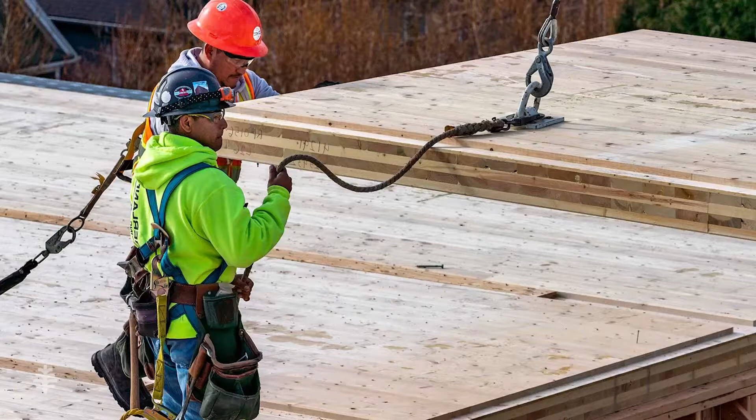As part of the agency's effort to steward the whole, the Forest Service helps convene the Keeping Forests Partnership. Keeping Forest is the Southern Region's high priority working forest conservation initiative, supported by around 40 partners from across the forestry community.

Forests really are our planet's hardest workers. They help drive our economy here in the South. They positively impact the physical and psychological health of our communities. They help filter our precious water and air. They provide abundant habitat for wildlife, and they offer a wealth of recreation opportunities.

Over 110 million people and growing call the South home and depend upon the benefits that the roughly 245 million acres of forest land in the South provide.

We're incredibly fortunate in the Southern region to have a long history of landscape level assessments related to forests. It dates all the way back to the late 60s. These assessments look at how land use is changing and also the condition of our forests. The most recent assessment, developed by the U.S. Forest Service and the Southern Group of State Foresters, is the Southern Forest Futures Project, published in 2012.

The Futures Report forecast that we could lose up to 23 million acres of forest land to development by 2060. Keeping Forest was started to address this potential loss of forest land, and the approach to conservation is radically different than the traditional approaches.

Partners within the initiative are a diverse range and include NGOs, industry, private landowners, federal, state, and local governments, water utilities, among others, but we all have a common mission: to ensure that in 2060, we still have at least 245 million acres of forest land in the region. We're focused on systems level change using a collective impact model.

Now, keep in mind, that's 2020 data, so we look at those prices. When we start comparing these, and look at the average size of an elementary school or middle school, high school, and so on, what you're going to see is the potential savings per square foot. Again, the cost per square foot is relevant to the time at which it was taken.

This comes from 2020 ICC. Now, ICC is the International Code Council -- they're the ones that develop the International Building Code. The numbers we're looking at are a summary of the average building cost. They pull this together twice a year, and this is what a municipality looks at when they look at permit costs based on what type of construction it is, what type of occupancy, which in this case is educational, and that's where this price comes from. So it's fairly accurate, but it does represent nationally what the cost would be.

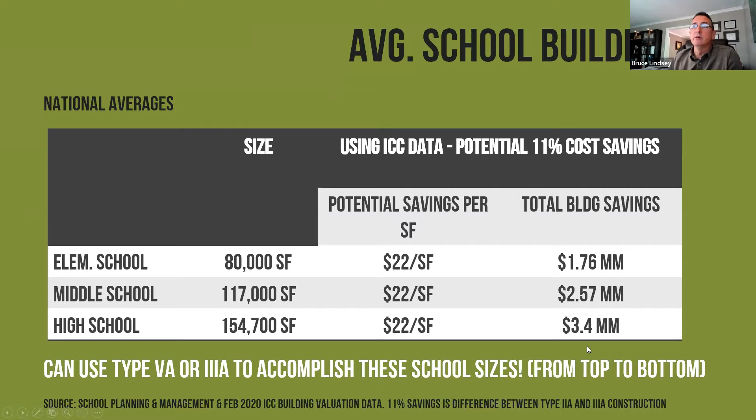So if you're looking at the average size school, you can see by using type 4 or type 3 and 5 construction with wood, we're talking millions of dollars in savings. This is critically important when we start talking about where wood fits into these schools, and what the draw is if you're on that school board or a facility director to go with wood -- something that typically has not been used in large scale educational facilities.

So here's an example: Fountain Lake Middle School in Hot Springs. If you look at that, it's traditional framing, sheathing, the initial steel and masonry estimates -- which I'll dare to say most of us probably went to a building or school that was composed of CMU and then steel of some kind for the roof system.

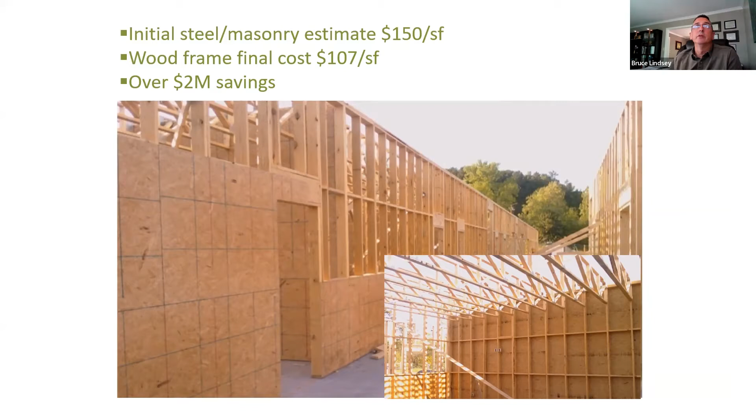You can see that over the entirety of the project, there was $2 million in savings.

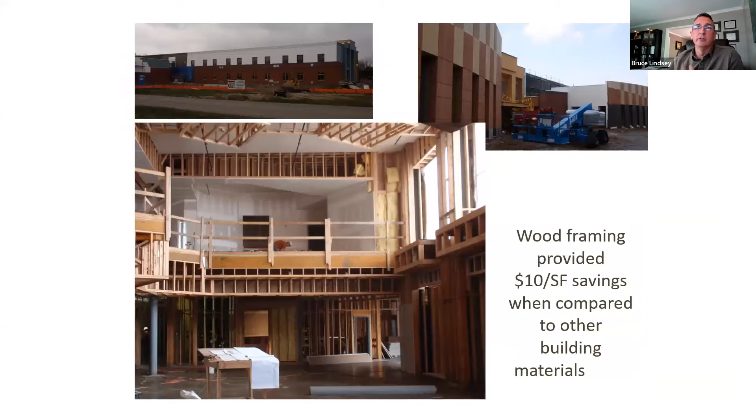Here's another one, an elementary school, 71,000 square feet. And again, you see about $10 per square foot savings in the structure compared to other building materials.

Newport Elementary School, now this is older, look at 2010, larger one, 124,000 square feet. Now I want to point out, you'll see some steel here. This is what we'd call a steel moment frame. Basically when the wind blows right to left or left to right, we have to brace the building somehow to keep it from racking, and so a lot of times we'll see steel incorporated into that. That's just a structural necessity depending on where it's at.

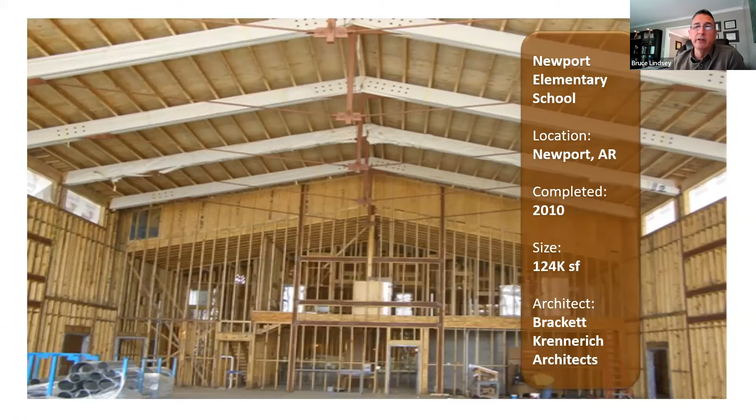So if you're near the coast, you're going to have high winds. If you're in a seismic area, we're going to have to deal with seismic loads. So sometimes you'll see that incorporated, but the reality is there's still a whole lot of wood in this project, and it's allowing us to do a lot of things we couldn't do before. So it is common to see a lot of hybrid projects.

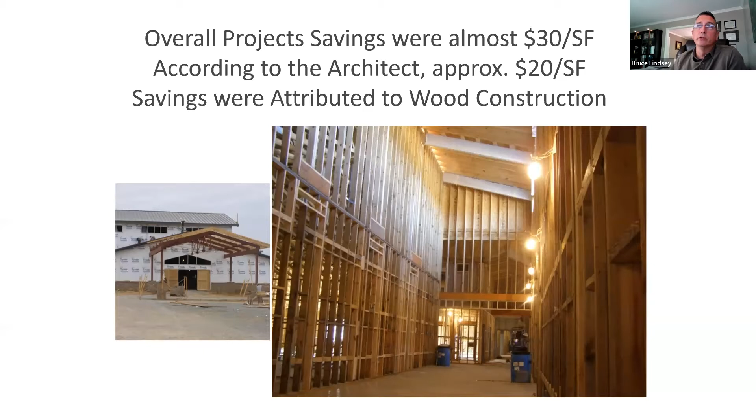But on this particular project, the savings were $30 a square foot, and according to the architect, $20 per square foot of that was attributed to the wood construction. So it is quite feasible. We've seen it, we know there's great savings to be had with that.

The El Dorado High School is probably one of the best examples, and you're going to see me reference it a lot today. As you look at it, you can tell it looks like any other school building. There's no way you would really know that it's wood constructed from the outside. It has all the durability and the beauty of any other project. And that's really the goal here, that you don't have to defer on efficiency and sustainability to get wood construction in these buildings.

And this is a large project. You're talking about 1,600 student capacity, over 300,000 square feet in total area. Now, again, this was built about a decade ago, so you're looking at a $43 million construction cost, which is unheard of at this point with costs now. But the construction cost was within the realm of all other building materials, so it was $134 a square foot for construction, and that was very reasonable and very efficient. It's a great project.

And this is going to become more important. Now, I showed you this before. This is the cost per square foot for an educational building, what we call an E occupancy. The occupancies vary - you could have residential for multifamily, E for educational, there's mercantile. These are broken down and fairly accurate, since ICC does their valuation data twice a year. So this was the cost in 2020, this is the February 2020 data. Let's just focus on one - let's look at type 3A, which is $175 a square foot.

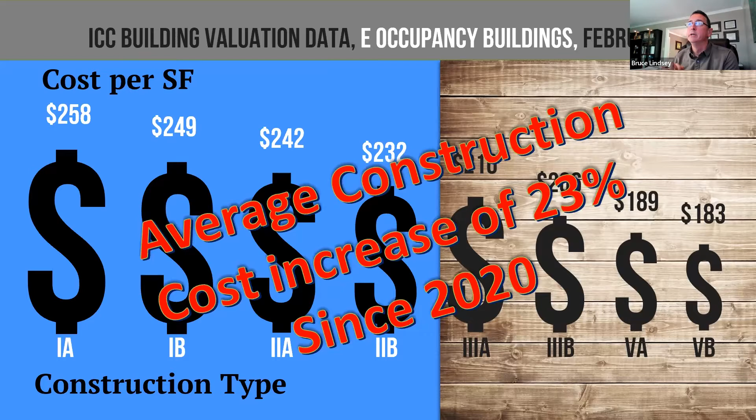It's been a great era for us in the wood industry, but there is a trade-off because it does slow down construction to some degree because of the high cost. Now what this means for schools is that if you're looking to build a project, you've got to add almost 23 to probably 25% by the time it's all said and done, just for the increased cost of materials. So more than ever, if you can save any money in the project, it's going to be critically important. What are we talking about in the school?

But if we start getting into higher education, high school and above, we're looking at things such as labs, which have a larger space, and libraries, which again, you could probably put some columns in, but you really want that appeal and the ability to store heavy materials such as books.

And then ultimately, the biggest span we see when we look at academic or educational buildings is that gymnasium or arena area. These are large spans, and that's more difficult.

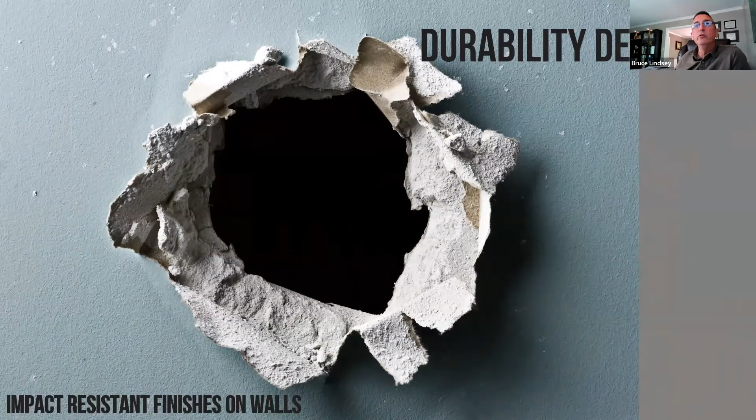One of the challenges and misconceptions about using wood in educational buildings is durability. We've all gone to school, we've all seen at some point somebody damaged, carved, cut, or vandalized something. The general perception from the public, and particularly from facility maintenance directors, is that wood is not durable.

One of the biggest things is something as simple as a library cart going down the hallway. If it's just sheetrock, it's going to gouge into it if it hits it. If you've got 1,000 students changing classes every hour and a half, book bags banging into it, leaning on it, graffiti, writing, handprints, you name it.

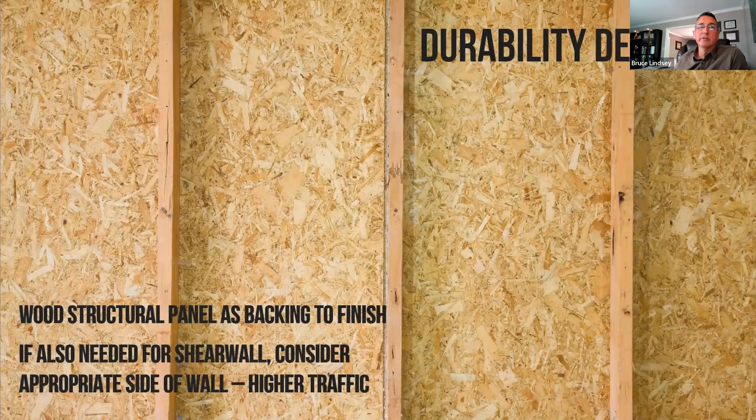Gypsum is not always the answer, and that seems to be the more typical way to do it. One way to avoid those penetrations is to simply put a wood structural panel behind it. Very cost effective, very simple, and structurally it makes the building much more rigid, giving it what we call shear walls, which eliminate the building from racking, and many times are actually required to get the structural capacity out of the building. So there are ways to do it, and we have to be smart about it.

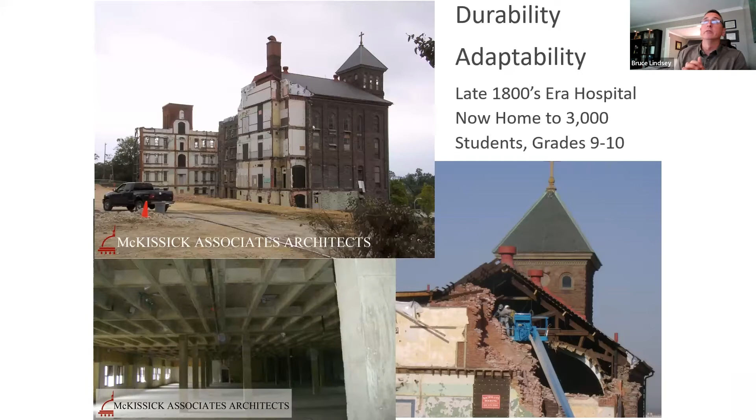This is actually up in Pennsylvania. This building's over 100 years old. It was a hospital. Now it is a school that's home to over 3,000 students in grades 9 and 10.

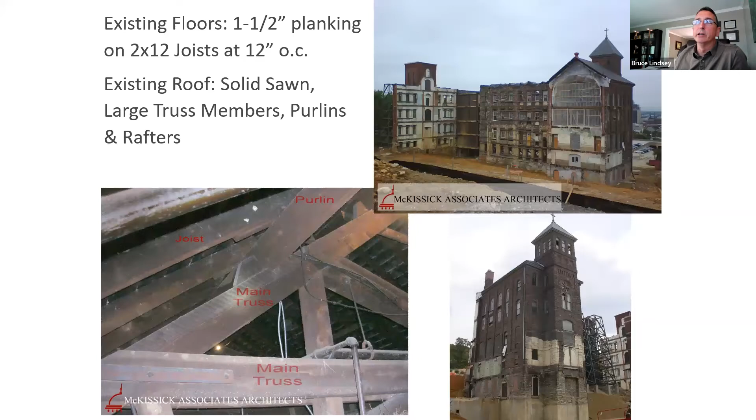So it was an existing floor with planking. You can see the old building there that they've gone in, they've cleaned it up, and you can see that bottom right-hand picture. This was a beautiful, beautiful building. It's quite iconic in the area. And you can see the results.

So for this intermediate high school in Pennsylvania, and again, this was back in 2010, they did almost 200,000 square feet of renovation and then added 122,000 square feet as an addition at a cost of $79 million. Now, keep in mind, 2010, that cost is likely doubled by this point, but there was huge savings in renovating that, and look at the beauty of that.

And that's the reality of building something that has beauty and it has value to the community. They're going to tend to take care of it. And they're going to tend to want to keep it. And that relates to long-term investment.

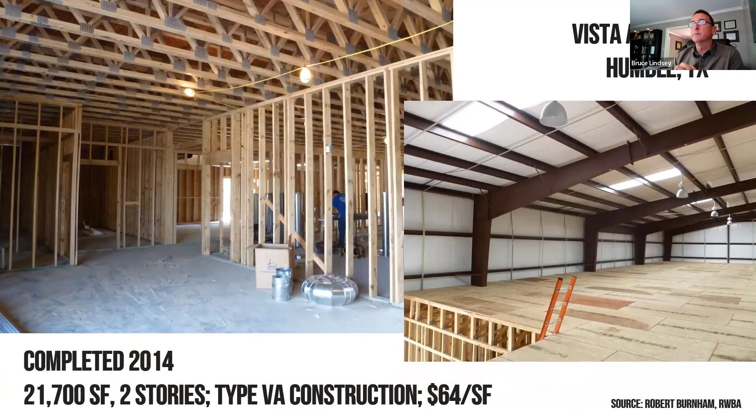Here's a project in Texas. This is a school. It was built out of wood. Now, again, notice on the far right, you'll see that there's a steel structure there. And that's what we call a pre-engineered metal building, a basic warehouse. And then they've gone in and they filled in the floor system with wood. Very cost-effective way to do it.

Not real attractive. And the reality is when this building gets to a certain lifespan, it looks like any other warehouse, and it's not likely to maintain itself with any value, although I don't know what the regionality of this was. It may be a school system that's remote, it's suffering from financial problems like every other one. This might have been the best resource they had.

Compare that to this. It was $30 a square foot more. But look at that compared to this. And the reality is, what is the longevity comparison?

This is a beautiful building. There's a good chance that the community is going to embrace this building and see the beauty in it, and they're going to maintain it. They're going to want to keep it. So that investment, as you look over time, even though it costs roughly $30+ more a square foot, you've got something that's much more valuable and has much more longevity for a variety of reasons. And it's much more beautiful.

Looking at those gym areas, we're talking areas that are 7,000 square foot, give or take, with ceiling heights that are over 20 feet. And the spans range from 60 to 300 feet. Now, most wood products don't span that far. We're talking about 2x, we're talking about trusses, I-joists, whatever it may be. But there's some limitations on what they can do. About 30 feet with trusses and I-joists. Obviously, about 20, give or take, with traditional lumber.

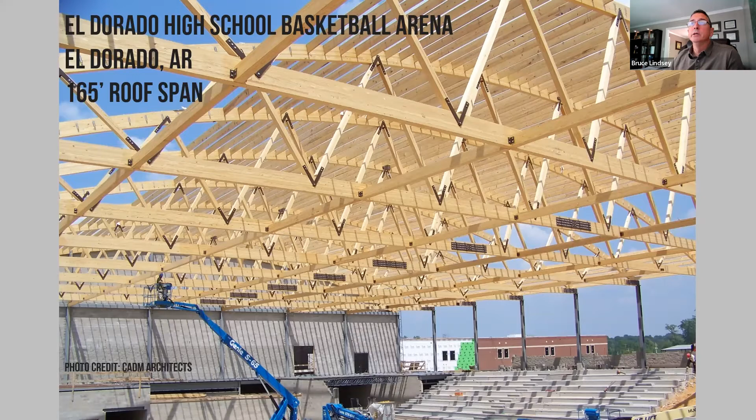Or we can do something like this, where you've got a heavy timber truss, what we call a bowstring truss, where it's bowed across the top, straight across the bottom, and then 2x for purlins in between, and then it's sheathed with traditional plywood or OSB. And the result of what you get is this, a beautiful building. It's got the durability that it needs, both from a structural standpoint, but also from a community value standpoint.

In this particular project, they saved $60,000 by changing that gym roof from steel to wood. So not only did they save money, they've also got a much better end result that's going to have value in the community for much, much longer.

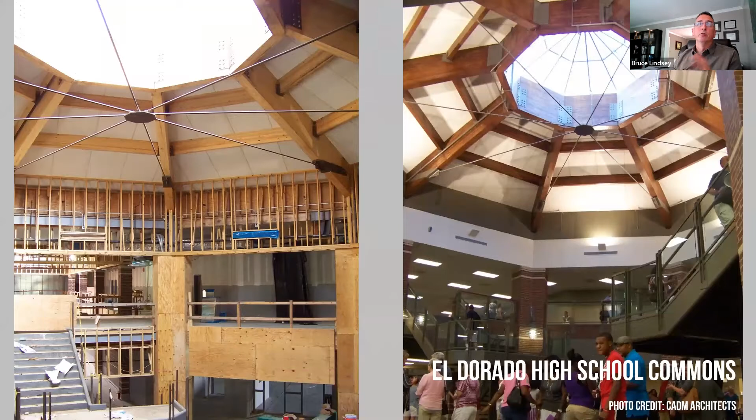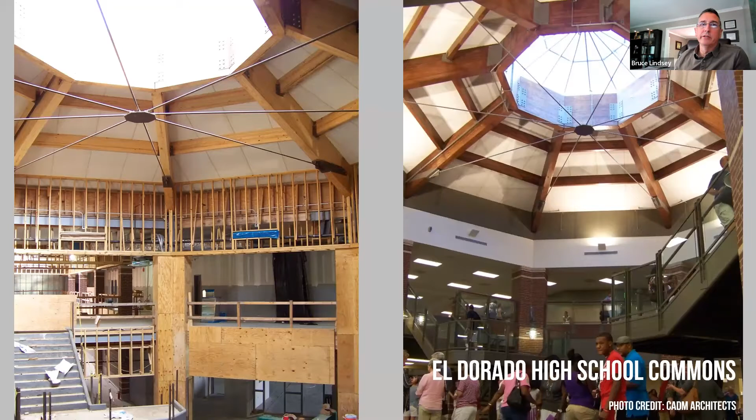Going back to that El Dorado project, here is the center public area. And you'll notice that they've used glue lam. It is wood framing, but look to the right when it was completed, you'll see brick protecting the wood surface down low, but you still get this beautiful roof element using glue lams to get that heavy timber concept across.

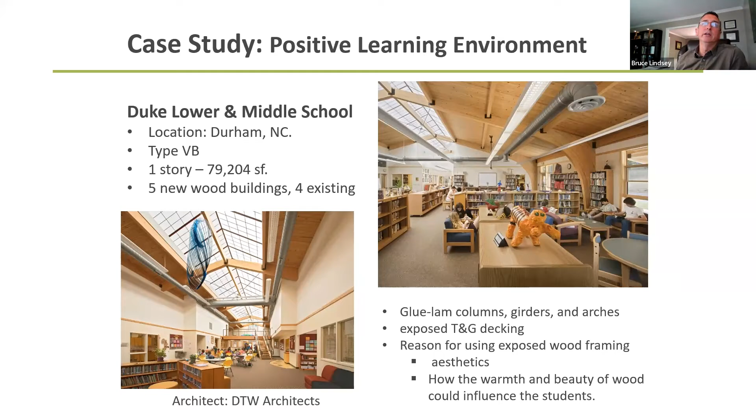And what they found, they did 3 periods. First, simply just waiting in the room, like you would in a doctor's office or anything else, quiet, waiting in the room. The second portion was taking an audio-given math test, so a little bit of stress inducement. And then the third part, recovery after that.

And so what they were monitoring was the sympathetic nervous system, heart rate and skin conductivity, which you tend to have sweat and more conductivity with stress. And what they found is when you measured that stress, it was lower in a wood room in all periods of the study. And we've known this.

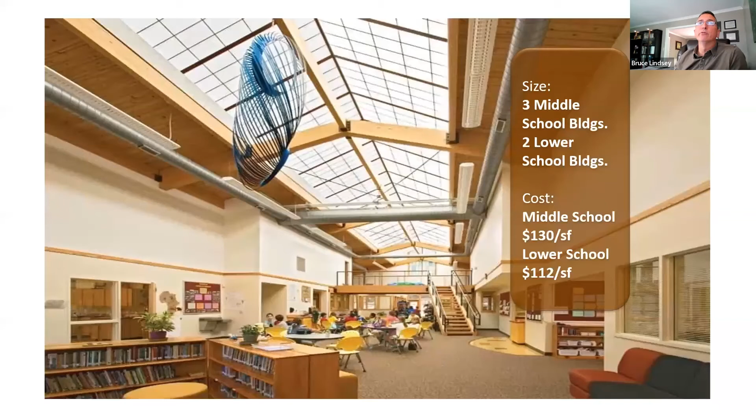The Japanese have done a lot of studies on this. The Canadians, you'll find a lot of their healthcare facilities incorporate wood. We know it to be an effective part of learning. And Duke Middle School, Lower Middle School is a great example of that, where the architect really tried to incorporate that environment and really keep it as a warm, welcoming, natural feel throughout the entirety of the building.

And even as we start to move around and look at it, it's even carried over to the outside. So an absolutely beautiful project, very cost effective, and did its job. And as I go back to, it needs that wow factor for it to be something that appeals not only to the community, but to the students themselves.

There's still an exceptionally high dropout rate in our public school systems. And now the challenge has gone beyond that. Now we have the challenge of keeping teachers. And that's really been the bigger challenge within the last 2 years through the pandemic. We all know that teacher pay is not the greatest in the world, and these are some of the most dedicated people you'll find. If they don't have a nice facility to go to, that just stacks on and adds to that pile of grief that they deal with on a regular basis.

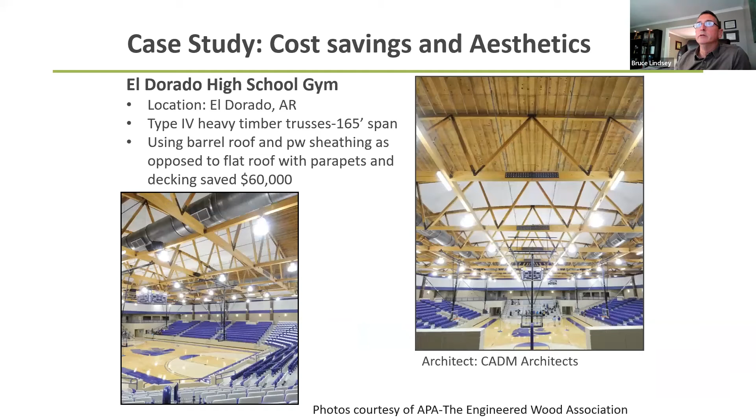Here's that El Dorado High School gym once it was completed. Very modern looking, very appealing, yet still warm and inviting.

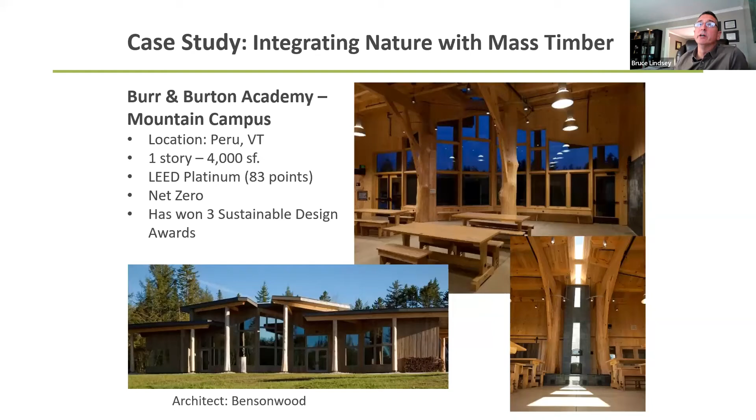And then here's a very unique one. This is not going to be a common school. This is in Vermont, one story, only 4,000 square feet, but it has won a wealth of awards based on the fact that it's a net zero building, very sustainable. It's won a LEED Platinum - I'll talk a little more about that. And notice how they use the tree trunks basically as is, and incorporated it into the design. Very unique and beautiful building.

So let's look at those. We've looked at these, and that's more of a traditional study of projects, what they look like. Again, these aren't always large buildings, 1 to 2 stories on average, very simple to do with common light framing, wood, lumber, I-joist trusses, things of that nature.

Now, if we look back at that El Dorado High School, you'll notice - and I think there might be another picture - the gym walls are concrete masonry, CMU block. Common to most educational facilities at that scale. There's reasons for that: one, you've got to have that lateral stability.

If you think about all the mass up high for the roof system, you've got to be able to stabilize that in a 100+ mile-an-hour wind or in a seismic event. Reinforced concrete masonry can do that. And historically, that's what we've always done.

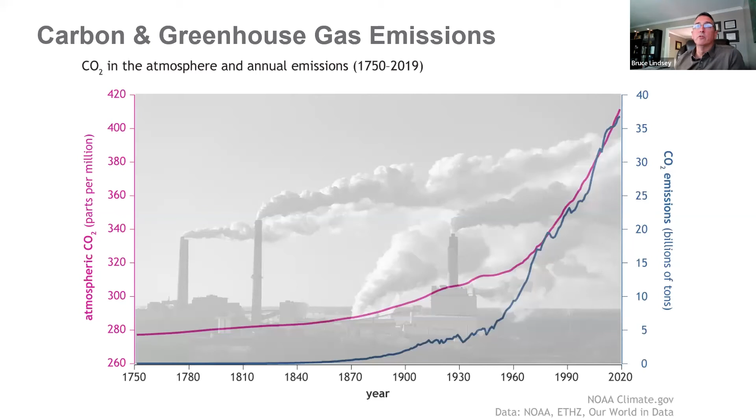The concern is once we get past that 450 parts per million, it's a cycle that we cannot reverse as a society. A lot of this is simply based on the fact the sun's continually putting energy into the earth, and over millions of years the earth has taken this energy and converted it into fossil fuels and other factors. We've been burning that. So you take millions of years to compact this energy into fossil fuel elements, and now we've burned it basically in the last 200 years, releasing all this energy into the atmosphere, and with it, the carbon dioxide. So it's no surprise based on that data that we're really experiencing a lot of global warming potential.

It really breaks down to the chemistry. Everybody remembers CO2 from elementary school. A tree absorbs carbon dioxide, CO2, and then releases the oxygen, the O2 portion, and keeps the carbon. So as a tree takes in carbon dioxide and keeps that carbon, remember it's releasing the O2. So 1 ton of carbon in a tree does not equal 1 ton of carbon dioxide.

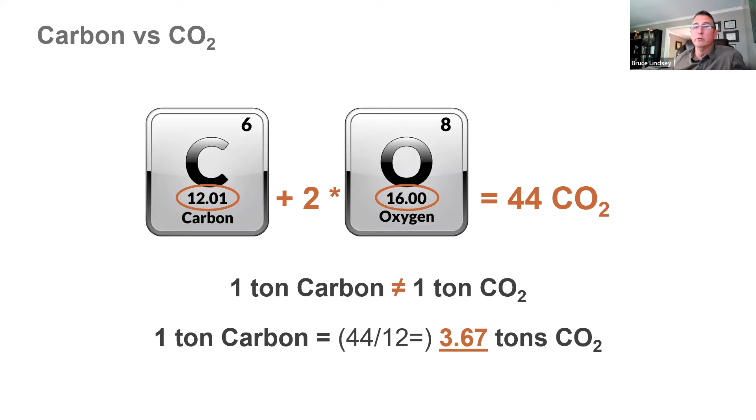It's actually a much better message. 1 ton of carbon stored in its elemental form in a tree or a wood product afterwards is the equivalent of 3.67 tons of CO2 taken out of the atmosphere. This is nature's way of doing what it's done for millions of years throughout Earth's lifetime, and our industry plays a huge part in this.

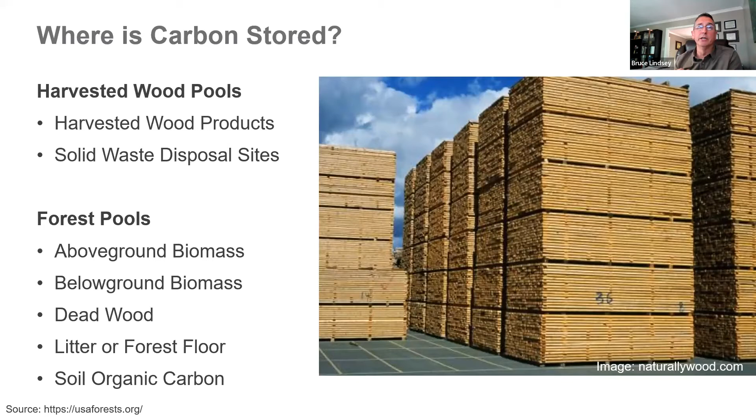So where is the carbon stored? It's in all of our harvested wood products, our solid waste disposal sites. There are pools out there—and by pool I mean collectives—above ground biomass, below ground biomass, and there's a lot of other discussion we could have on that.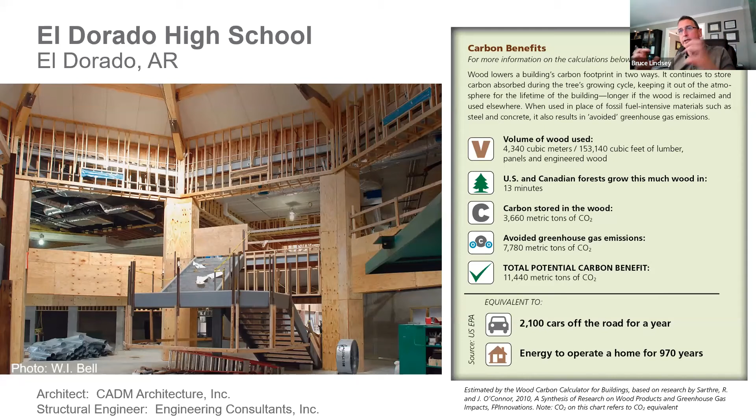This is huge, and if we can get all of our buildings to this point, this really drives a lot of things. It really brings into question two things here. I need to kind of fly up here, we're moving a little slow.

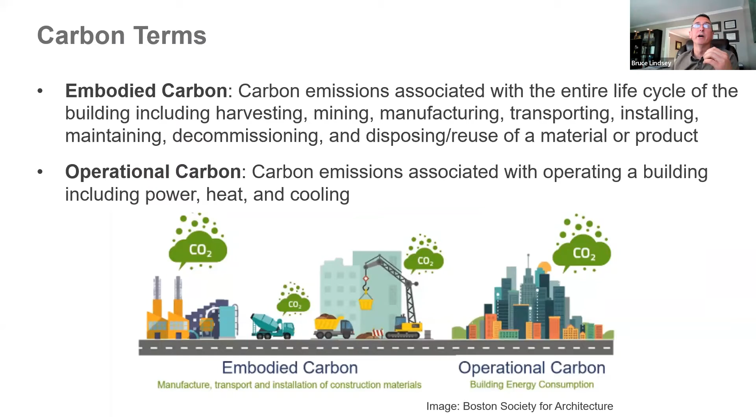Embodied carbon is the carbon associated with the building product, so wood is obviously capturing that. Other products are not—they're creating it when we manufacture it. Operational carbon is what's used in the building as you utilize it, the energy usage to heat, cool, and so on. There's a great statement in wood because it doesn't transfer thermal energy like steel or concrete—it's self-insulating to some degree. It takes less insulation and it's more cost effective. A great example is in Washington State, the Bethel School District, where they've got wood projects for their schools.

They save 4.3 million in utility costs over basically less than a decade there. And that's huge. Again, that comes back to more of that social sector of where do we fit in and what are we doing for our part?

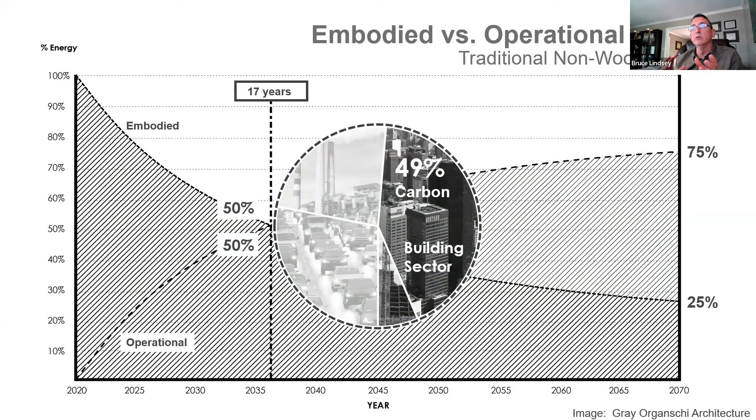If you look at embodied energy versus operational energy, we're getting down to where the buildings are more efficient. What that means is the embodied energy of the building elements becomes more important as we move forward in what we're designing out of.

So there's credit systems out there, a wealth of them. They haven't always been historically favorable for wood, but we're starting to see some movement toward that. As they start to become self-aware of what it means from a carbon sequestration standpoint, we're starting as an industry to gain some momentum and ground.

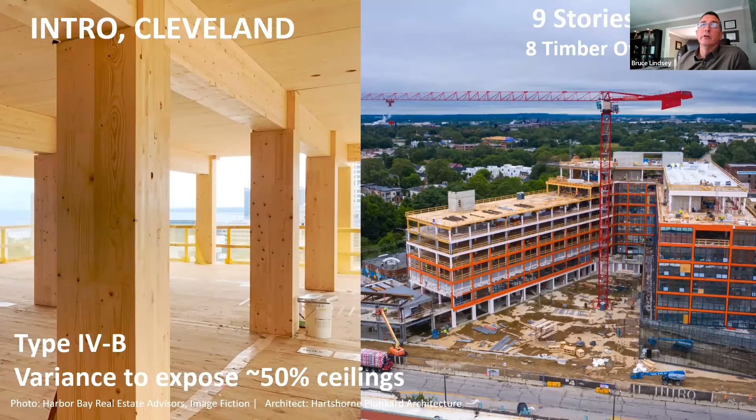So what's down the road for educational construction as we wind up here? Well, this obviously isn't an educational building, this is the Intro project in Cleveland. It's a multifamily project, but it is mass timber. It's 9 stories, with the bottom story being concrete, what we call a podium. The remaining 8 stories are cross-laminated timber and glulam. 500,000 square feet in Cleveland, and they're going to expose most of the ceilings, 50% I would say.

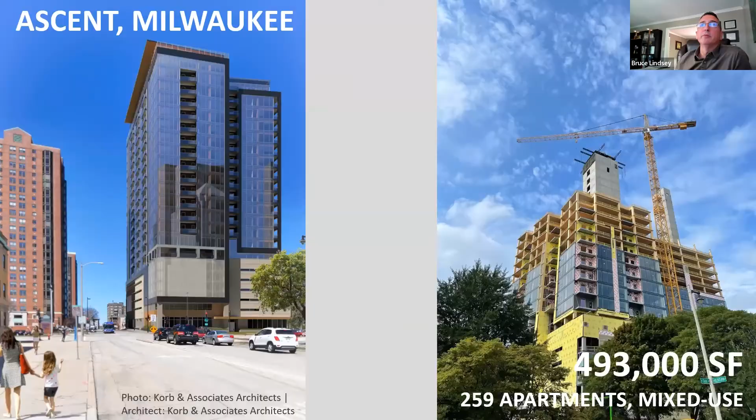And then this is the big dog on the block. At the time, this is the tallest mass timber building in the world - the ASCENT project in Milwaukee, almost 500,000 square feet, multifamily up on top. 25 stories, 19 of those are timber, over 6 stories of a concrete podium down below. You'll see on the right there's a reinforced concrete core for the lateral structure of the building.

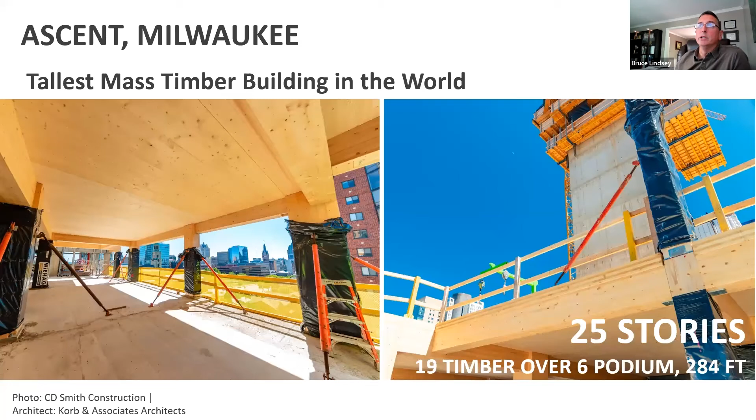But what does this have to do with school buildings? Well, as I said, we don't build that big, but if we look at mass timber as a whole, our group's been tracking this for some time. The ones we know about - we do this quarterly - at the end of March there was over 1,300, almost 1,400 multifamily, commercial, and institutional projects built with mass timber or a mix of heavy timber in the United States. You can get an idea of where they're being built, and for the majority, wherever everybody's at on this call, there are projects being built locally. A lot of it just has to do with the building code.

So the International Building Code is from the International Code Council. It's on a 3-year cycle, so all of this came around in the 2021 code cycle. That's going to allow us 3 new construction types. I mentioned type 1, 2, 3, 4, and 5. We didn't talk about type 4, which to the far right has been what we call heavy timber. It only allowed us to go to 6 stories historically. With the introduction of the new technologies of mass timber, this has been added to the 2021 International Building Code. It allows us to go up to 18 stories and 270 feet. That's how the ASCENT project and others were built based on this code.

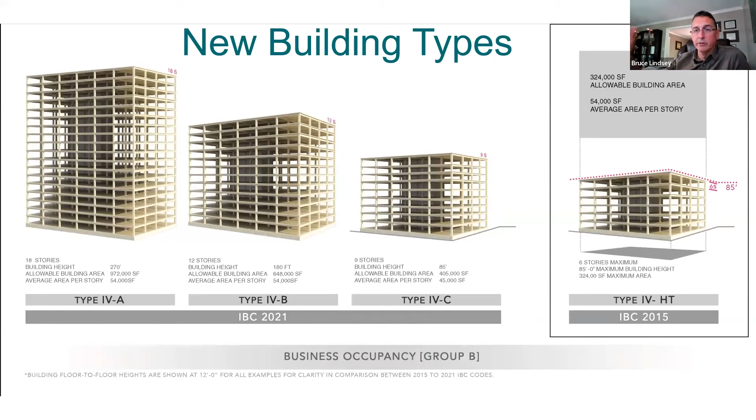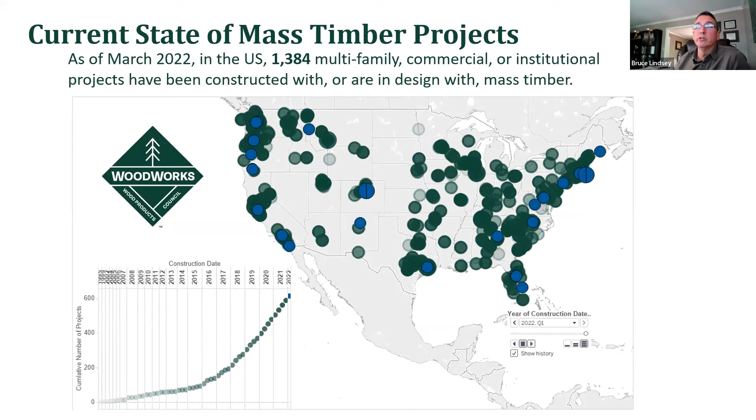Now the reality is these codes don't get adopted by the states for about 3 to 6 years because there's a lag as the states bring them in. So by 2024, most states should be utilizing this code, but there's always a lag depending on where you're at. The reality is that we know there's continual growth in mass timber as it moves forward, and you can see that curve moving sharply north, and that's good - that's exactly what we want to see. We expect more of that as the codes start to embrace it.

And as we see the sustainable motivation from not only the government, which is probably going to start mandating some of this, but also from private industry - we're starting to hear about investors that want to meet their sustainable goals as well. So they're telling these developers and general contractors that you have to build to a sustainable level. And wood, as I've mentioned, plays a great story in that.

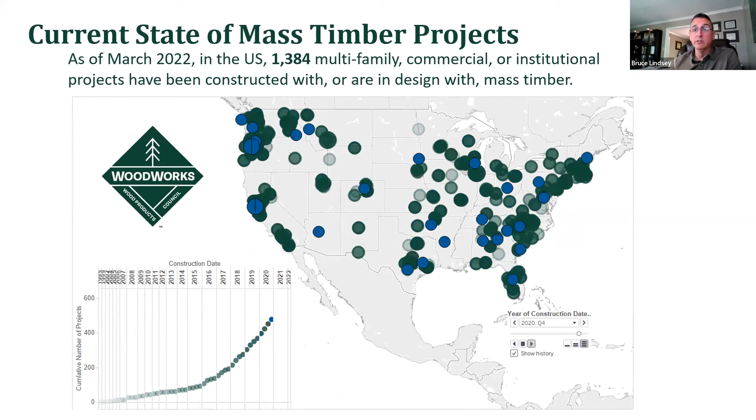So CLT, as we start bringing it into mass timber in the schools - this is a project that was on some of the emails going out. This is a 2-story project up in Franklin, West Virginia. It was built in 2015, so it's some time back, but this was the first CLT school in the U.S.

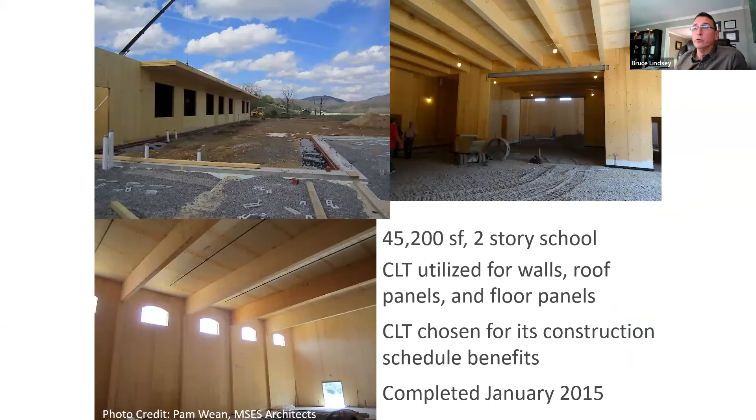They erected it in less than 3 months, and that's part of the story of mass timber. It goes up really quick, and there's some savings there. It's good to have the right general contractor that knows how to do that. But again, 2 stories, simplistic.

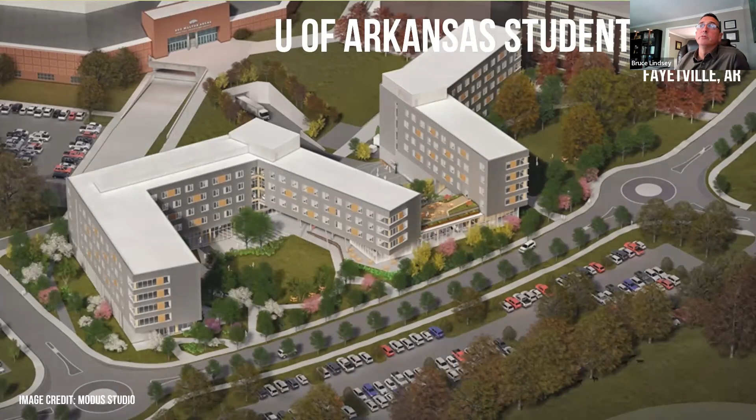There's that gymnasium we looked at earlier, and some other projects. Now, if we start looking at more university level academics, this project up in British Columbia utilizes CLT for the stair system. We don't have time to dig in today, but there's a lot to see. And for those of you down in Arkansas, the University of Arkansas built their student dorms with CLT and mass timber.

We've got a case study on that. Here's one of the highlights on our website, University of Massachusetts at Amherst. This is their design building, a 4-story project, 87,500 square feet, what we would call a Class A building. Absolutely beautiful project, really incorporating the wood and showing what you can do with it, not only from a beauty standpoint, but from a structural standpoint, utilizing mass timber in a variety of ways.

And then in Clemson, the Andy Quattlebaum Outdoor Educational Center, which was completed—I can't tell time anymore, like everybody else the last couple years were a blur, probably 3 years now at this point. Beautiful project here in the Clemson area. There's ways to go look at that, and it's turned out really well. That's on our website—it's won a variety of awards, including a Wood Design Award. You can see that on our website if you'd like to look at it.

So this brings us full circle. What's your role? Obviously our group with Woodworks and the Wood Products Council, we are trying to grow that, but we need everyone's help from the industry. We've talked about the ways to do that, and we really started reaching out to the general contractors because they don't understand mass timber—how to price it, how to erect it, you name it. So we've got the construction management program in place now, and we've got a manual and all of these different things behind the scenes.